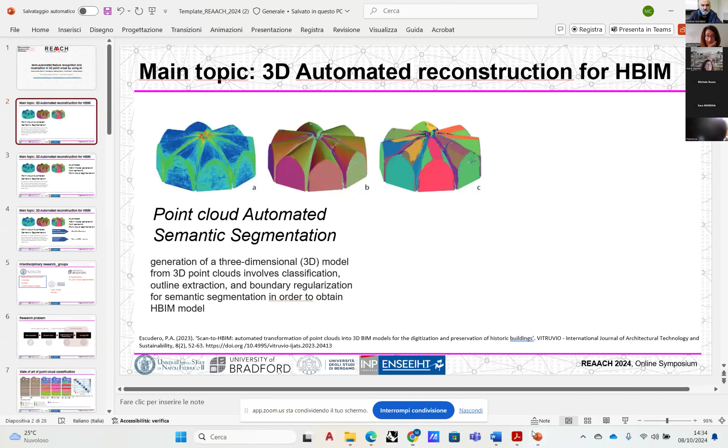Okay, sorry. The topic is 3D automated reconstruction for HBIM. We are interested in generating not a simple 3D model, but an HBIM, a model with information, as you know.

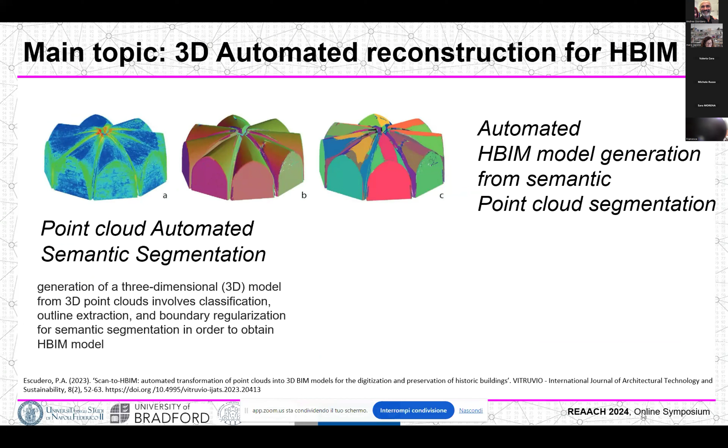We can define two main steps in this process. The first step is point cloud automatic segmentation, which is based on AI algorithms application. The second step is automated HBIM model generation from semantic point cloud segmentation.

Our research is an interdisciplinary effort carried out with the University of Naples Federico II, the University of Bergamo, and the University of Bradford, especially for the AI application for point cloud segmentation.

Now I'd like Victoria Cotella to continue the presentation. Thank you very much, Professor Capone, for the introduction. I would also like to take the opportunity to thank Pietro Azzola, who is with us. Thank you very much.

So I will present the research problem. As we usually know, in the scan-to-BIM pipeline, the main gap is about how to go from the segmented and classified point cloud to the heritage BIM. This is usually solved with manual BIM modeling, which is a really time-consuming process. So we are here to try to set a stepping stone in the research about how to solve this problem.

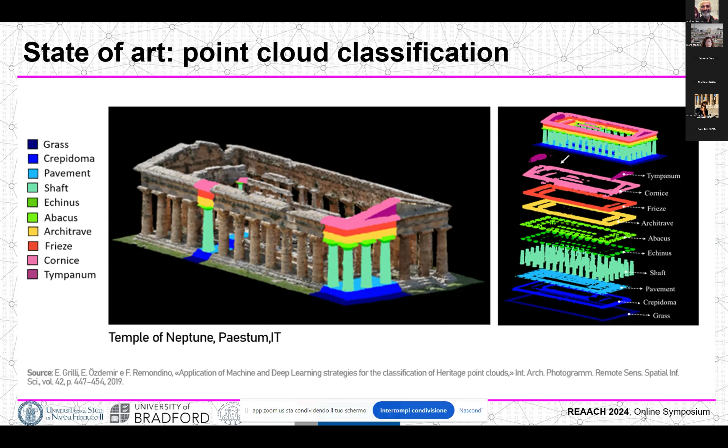This is another case, the Temple of Neptune in Paestum. They used criteria about different architectural elements in order to train and test the AI classifier. As we can see in the left and right pictures, we can see the already segmented and classified point cloud.

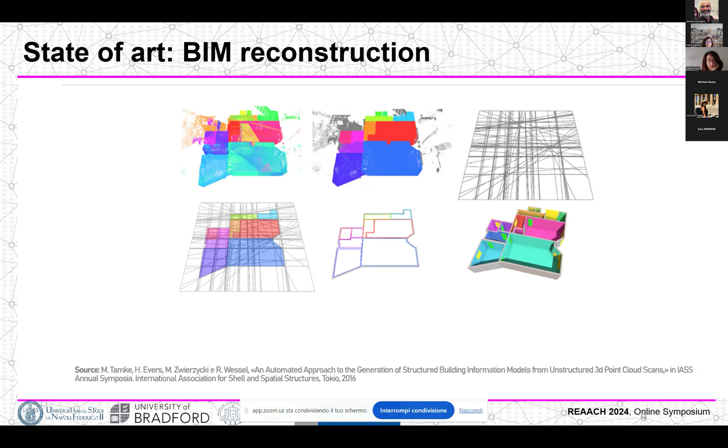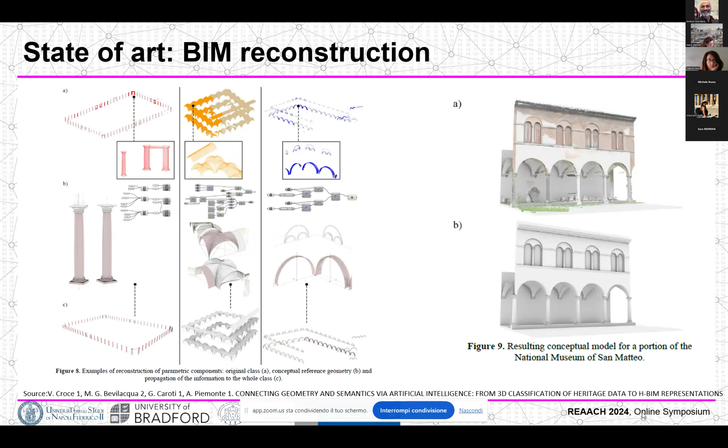This is a very interesting research about the application of visual programming techniques in order to reconstruct different complex geometries regarding cultural heritage.

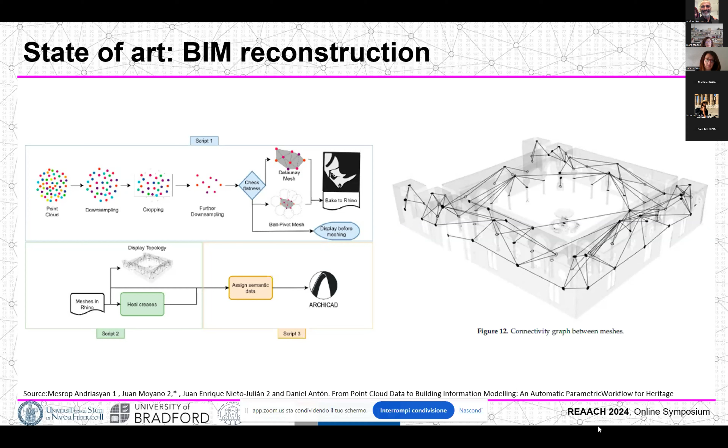So in our case, our pipeline work starts from the data acquisition process.

We start applying these digital survey techniques like terrestrial laser scanning, terrestrial photogrammetry, and aerial photogrammetry in order to achieve the 3D raw point cloud. Why raw point cloud? Because this point cloud only has RGB characteristics, the color and the positioning in a coordinate system.

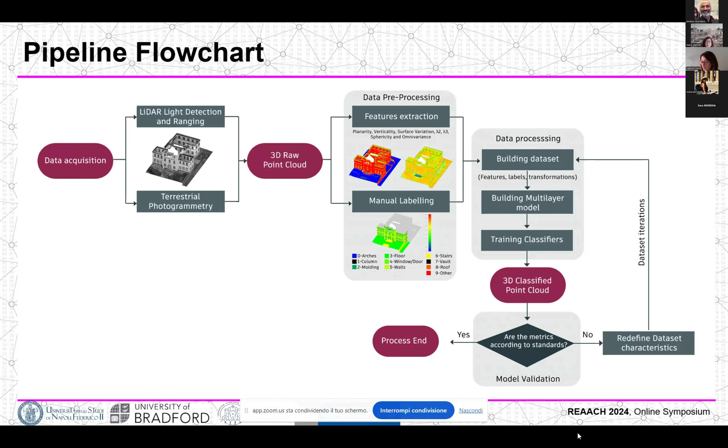That's why our next step is to classify first of all, and after that segment it, applying different AI algorithms. Our first step is to extract the mainly geometrical features. After that, to label our training and testing set in order to build our data set. After that we train the model, choosing a multi-layer model in order to take the best from each machine learning algorithm, creating a mix of everyone, taking the best of each one for each class.

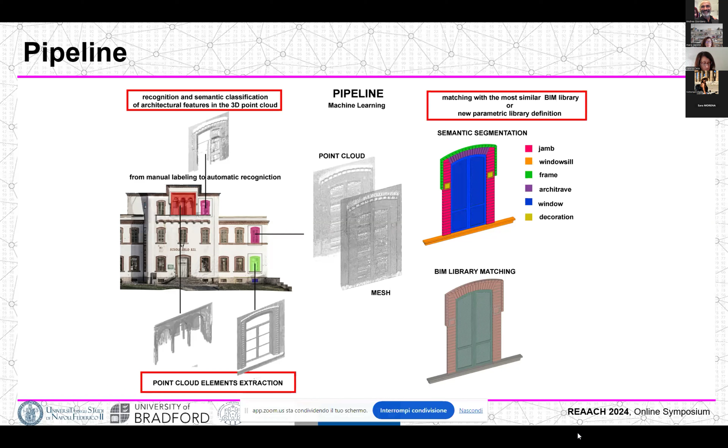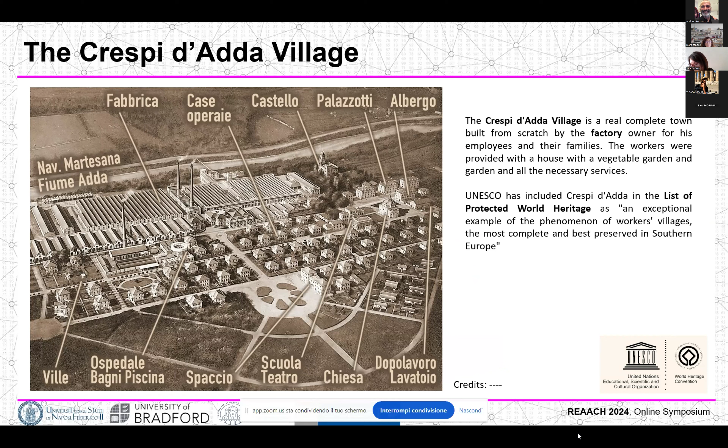Our case study is the school and theater of Crespi d'Adda, a UNESCO World Heritage Site located near Bergamo. This is the first result of the digital survey that I mentioned before, carried out by using TLS terrestrial laser scanning, aerial and terrestrial photogrammetry.

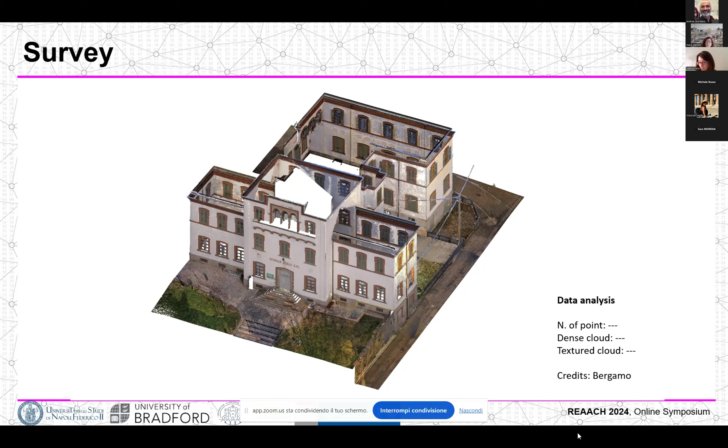In this step, we start with the pre-processing data in order to build our data set. We calculate using Cloud Compare the geometrical features, the covariance features from the RGB point cloud, with a radius of 0.2 meters in order to achieve better accuracy in the whole point cloud.

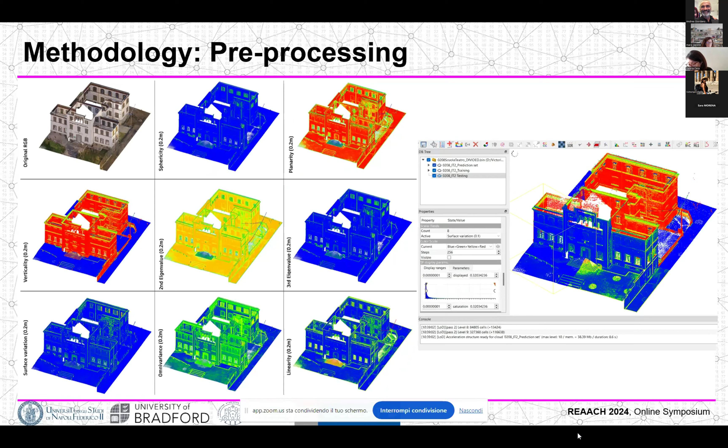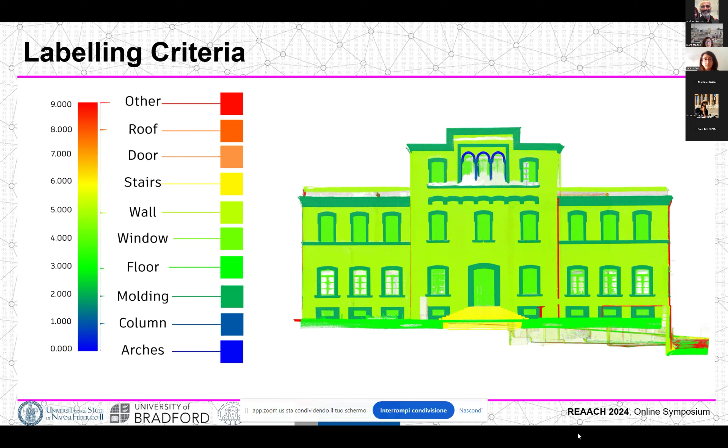After that, the data set was divided into training, testing, and prediction. The training and testing set was labeled manually with the following criteria shown in the left picture. To each class was assigned a scalar field in Cloud Compare.

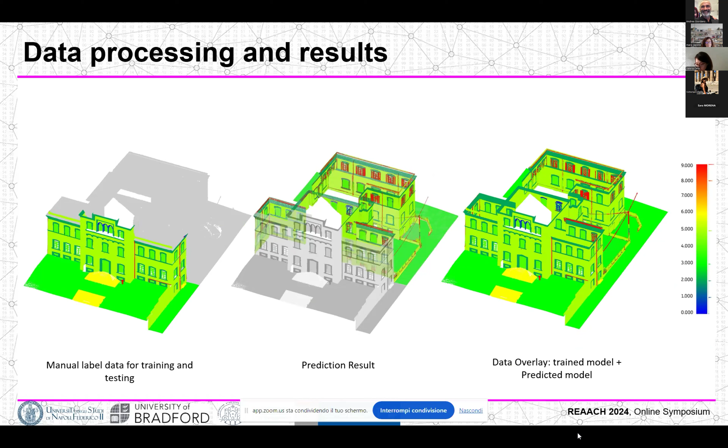Here we can see an overview of the step-by-step process. In the first image, we have the manual data labeling, the training and testing set together, using more or less 80% for training and 20% for testing. The second image shows the prediction results on the unlabeled data. The third is a representation of the overlay of training, testing, and predicted models.

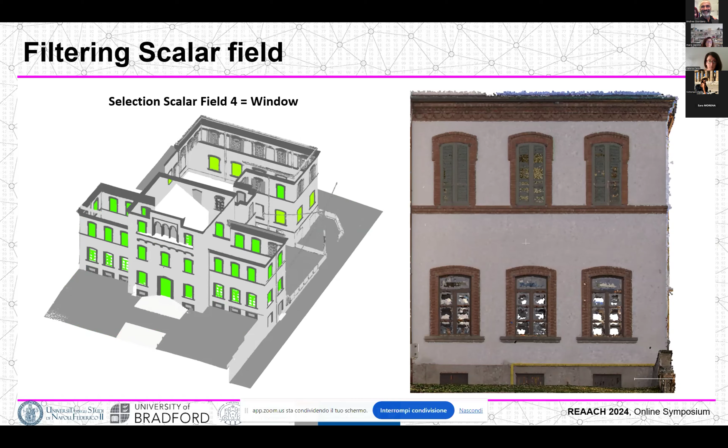In this step, we take one already segmented element in order to develop the BIM library. So we chose the window.

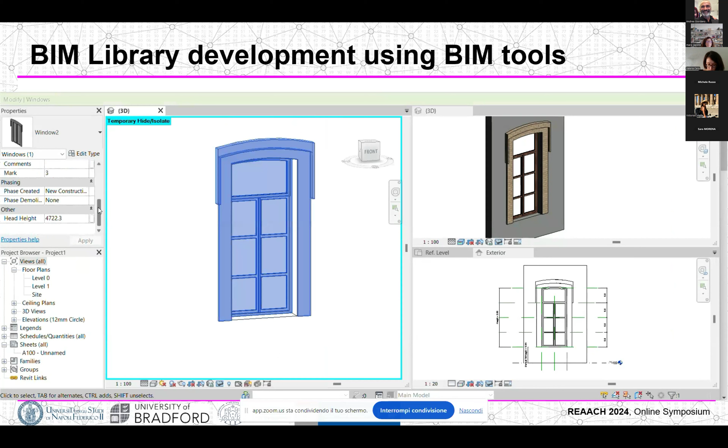This is the video. We developed the window family in Revit using traditional techniques. We could detect that the window is the same with some parameters that turn on and off, so we decided to use the traditional Revit family approach for this step.

Now I will leave the floor to Professor Mara Capone to finish this step. Thank you very much. We are testing another different approach based on HBIM element generation using VPL approaches based on geometry features. The main goal is to define a VPL, visual programming language, script capable of generating different architectural elements in a semi-automatic way.

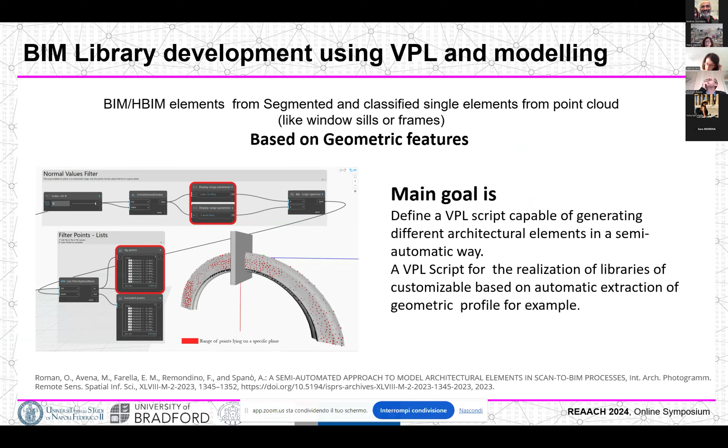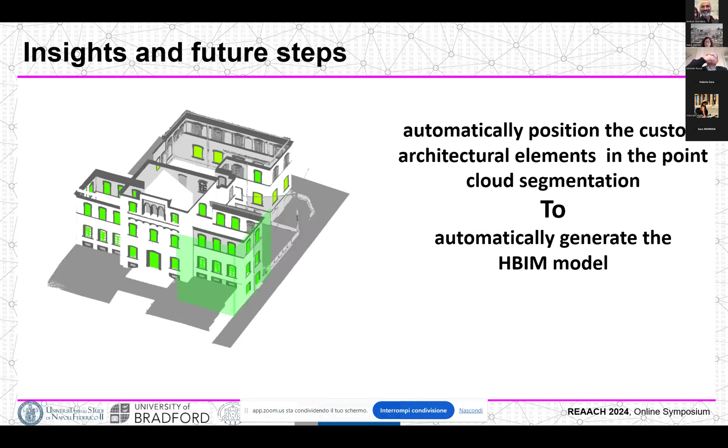We are testing VPL interoperability in Revit in order to automatically position the custom architectural element in the point cloud segmentation, to automatically generate the HBIM model. This is our testing, some tests to do this. We are testing some processes based on coordinates to place the element automatically.